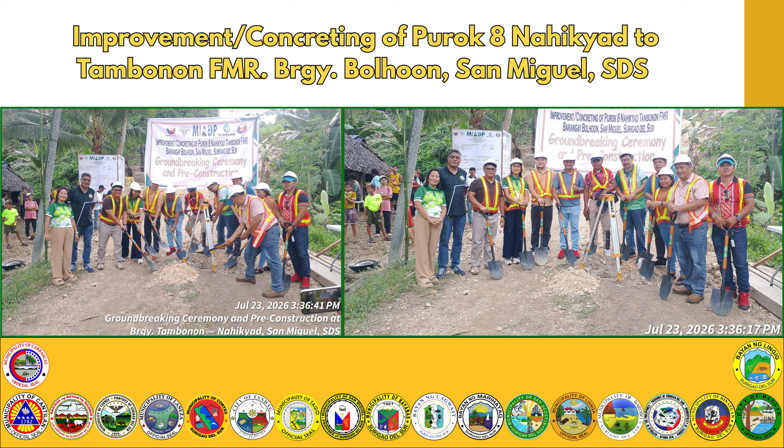Under the Mindanao Inclusive Agriculture Development Project, or MIADP, the Provincial Engineers Office is implementing projects amounting to 58.39 million pesos. To officially commence these projects, a groundbreaking ceremony and pre-construction conference were conducted in coordination with our stakeholders, ensuring that implementation would proceed smoothly and in accordance with project standards.

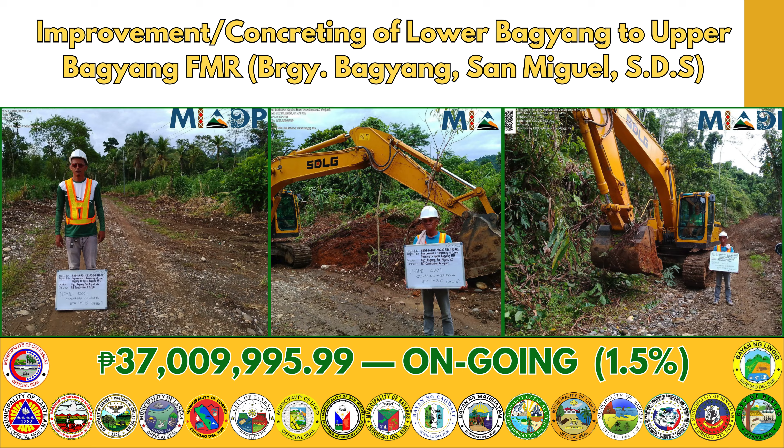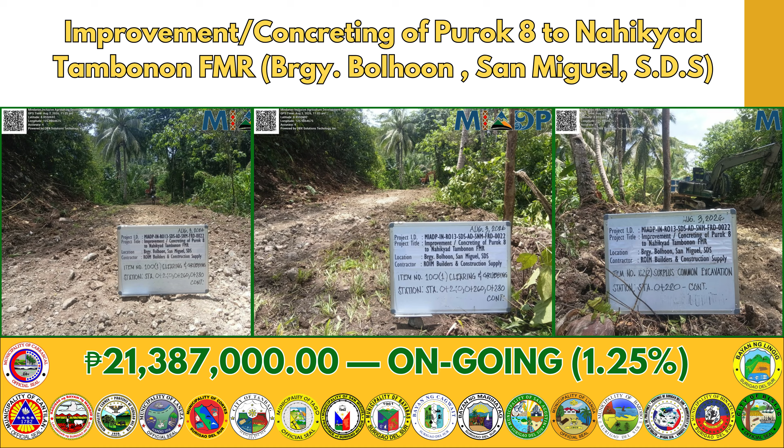Construction is now underway for the Lower Bagyang to Upper Bagyang Farm-to-Market Road and the Purok 8 Nahikyad Tambonon Farm-to-Market Road, both in San Miguel. These projects are steadily progressing and are expected to improve connectivity, support agricultural productivity, and create better opportunities for the communities they serve.

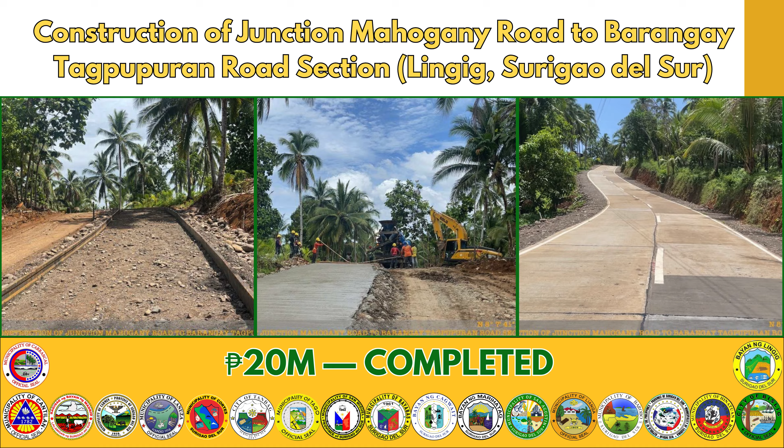Under the LGSF-FALGU program, with a total allocation of 45 million pesos, the Provincial Engineers Office successfully completed both Phase 1 and Phase 2 of the Junction Mahogany Road to Barangay Tagpupuran Road in the municipality of Lingig. These completed projects have significantly improved road connectivity and accessibility for the local community.

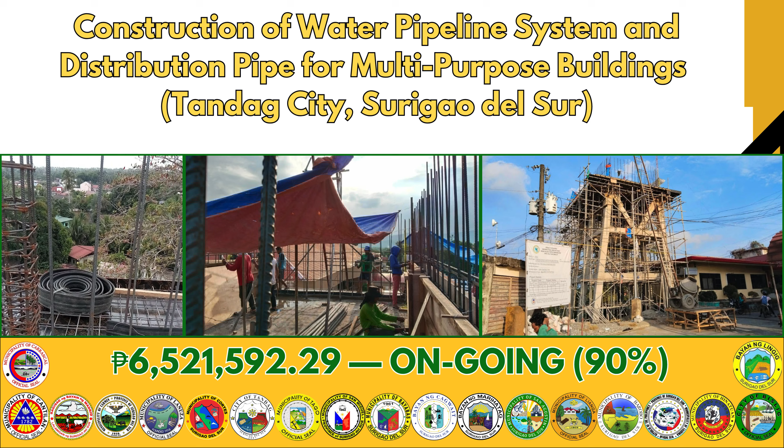Under the National Wealth Fund, projects amounting to 37.45 million pesos continue to make steady progress. These include the construction of the water pipeline system in Tandag City and the completion of the Madrid District Hospital multipurpose building, both of which are nearing completion and will strengthen public services within the province.

Through the PAMANA program, infrastructure projects continue to improve connectivity in geographically isolated communities. PAMANA Office of the Presidential Advisor on the Peace Process, OPAPP, funded 50 million for road construction in San Miguel, and PAMANA Department of Agriculture funded 66.65 million for road opening and concreting at San Agustin. This is expected to provide safer travel, improve access to government services, and support local economic development.

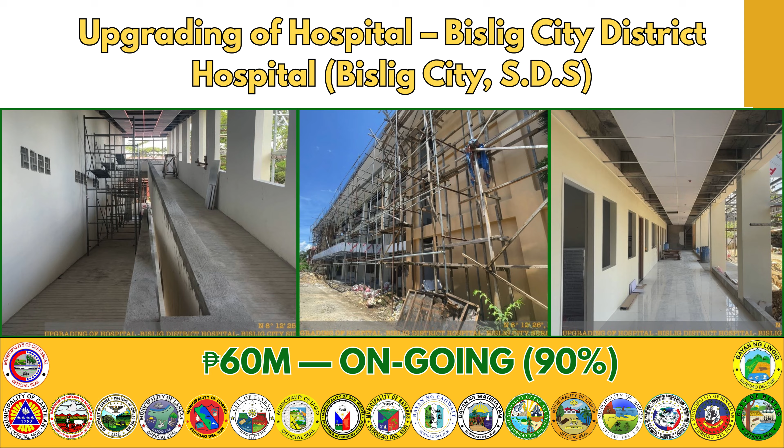Under the Health Facilities Enhancement Program, the upgrading of Bislig District Hospital and Lingig Community Hospital continues to progress. This project demonstrates our commitment to improving healthcare infrastructure and ensuring better medical services to our constituents.

Moving to our locally funded projects, the 20% Economic Development Fund, amounting to over 156 million pesos, continues to finance priority infrastructure across the province. Several projects have already been completed, while others are progressing well, contributing to improved transportation and public facilities in our municipalities.

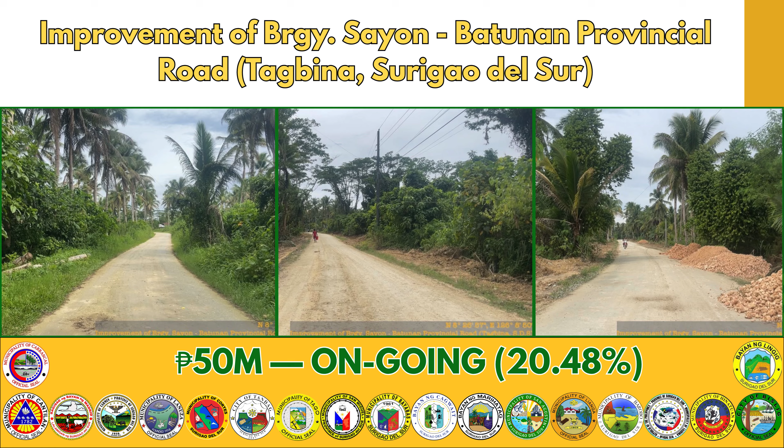Under the General Fund, the Provincial Engineers Office continues the implementation of road improvement and public infrastructure projects in Tandag City, Bayabas, Bislig City, and Lingig. These projects are steadily progressing and will further enhance accessibility and public service delivery.

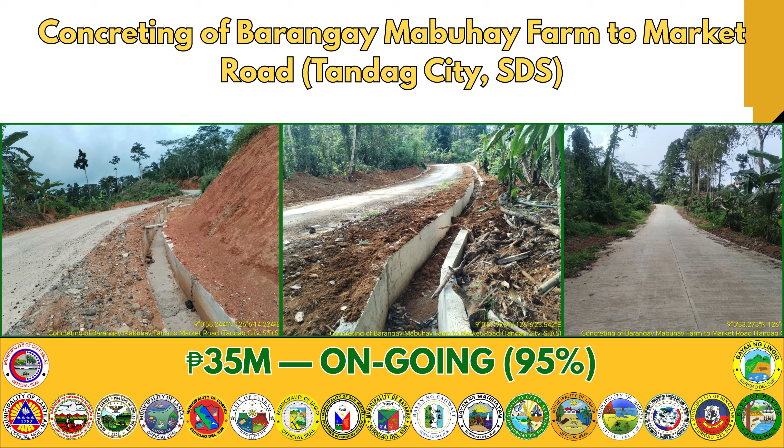Projects funded under the Peace and Order Program, with a total allocation exceeding 208 million pesos, focus on improving farm-to-market roads and provincial road networks. These initiatives help strengthen mobility, promote peace and development, and improve access to remote communities.

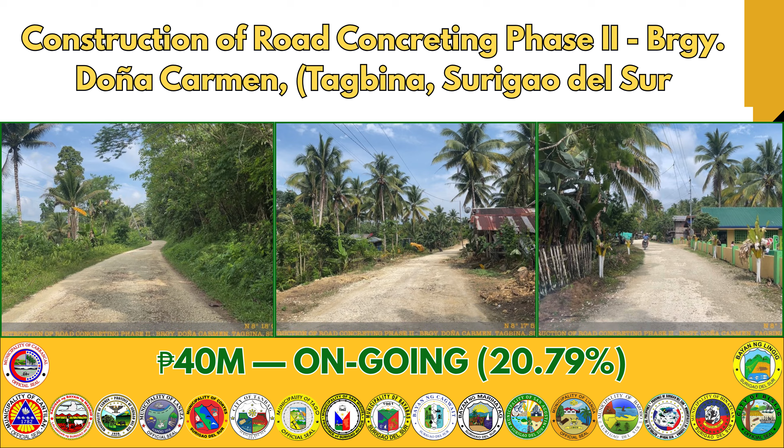Under the PDRRMO continuing appropriation with an allocation of 30 million pesos, the construction of the PDRRMO Building Phase 1 is also progressing steadily. Once completed, this facility will further strengthen the province's disaster preparedness and emergency response capabilities.

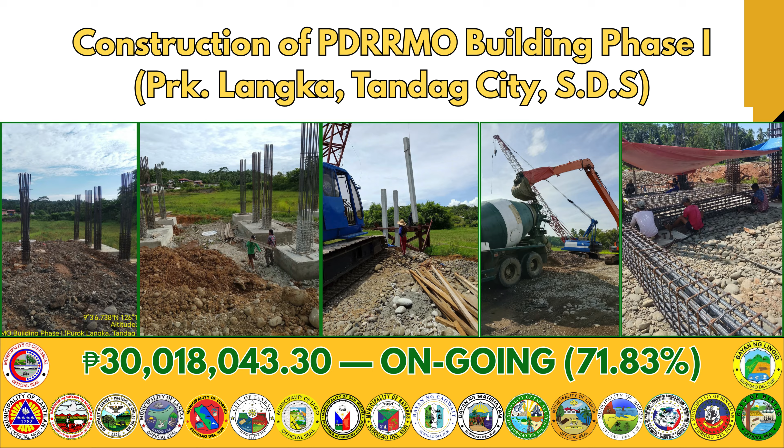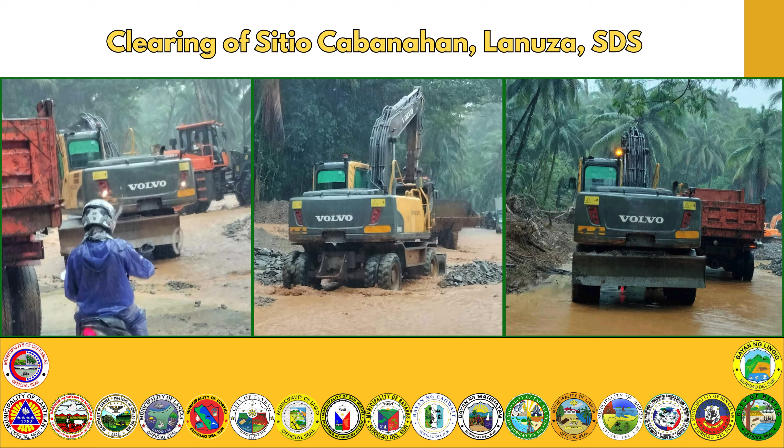In response to the devastation caused by Typhoon Bashang, the Provincial Engineers Office immediately deployed personnel and heavy equipment to conduct clearing operations across Surigao del Sur. Our priority was to restore road accessibility, ensure public safety, and support affected communities.

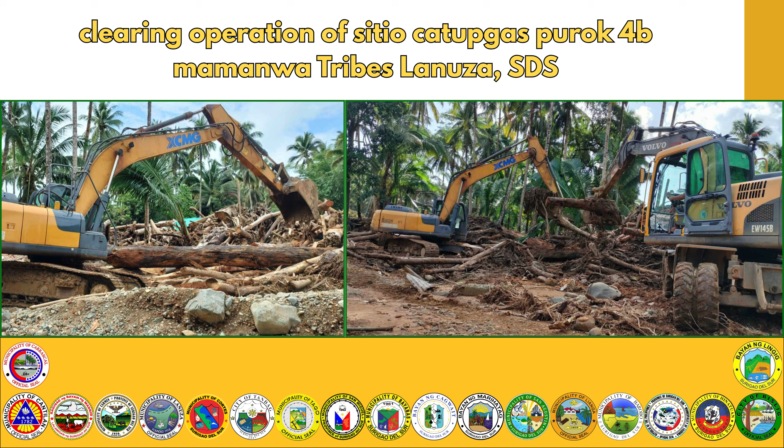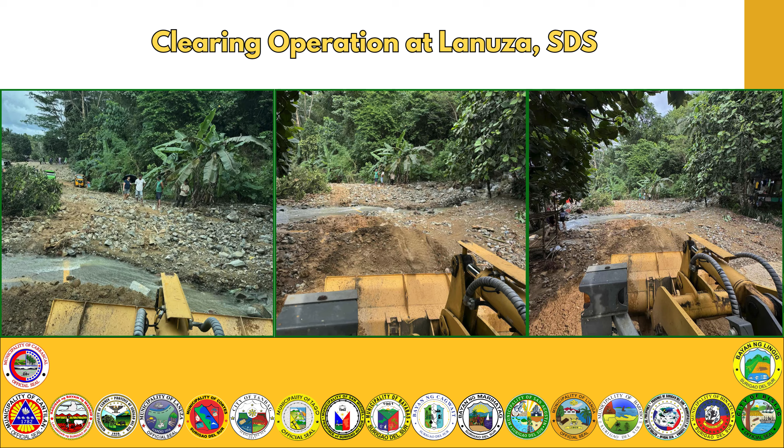Emergency clearing activities were carried out in the municipalities of Carmen, Lanuza, Cortes, Tandag City, Bayabas, Cagwait, Bislig City, and Lingig. These operations involved the removal of landslides, fallen trees, debris, and other road obstructions, allowing the safe passage of motorists, emergency responders, and relief operations.

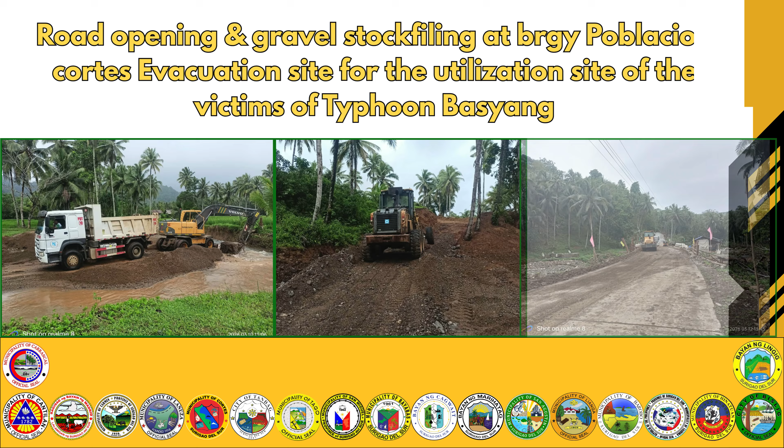These accomplishments reflect the dedication and teamwork of the Provincial Engineers Office, in close coordination with the provincial government and partner agencies, in ensuring the safety and resilience of the people of Surigao del Sur.

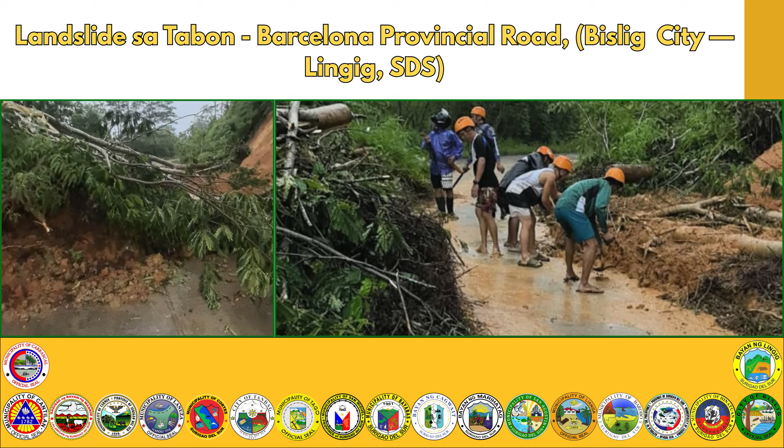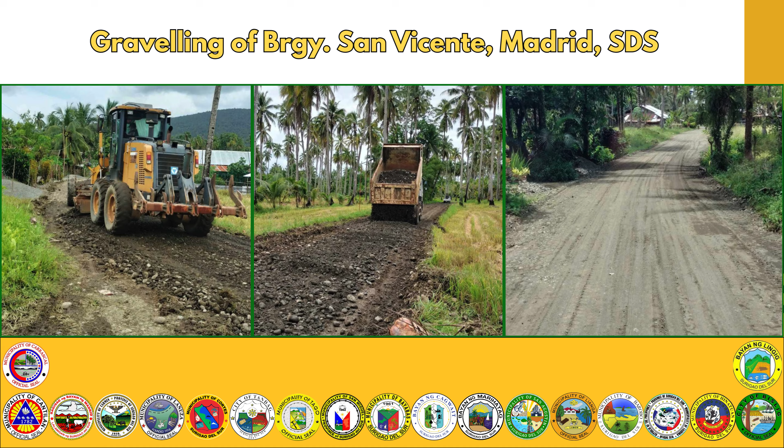Road maintenance is one of the office's core responsibilities. During the reporting period, the Provincial Engineers Office successfully repaired and maintained 268.98 kilometers of roads, hauled over 208,000 cubic meters of embankment materials, and provided engineering services to 65 barangays throughout the province. Projects covered a wide range of infrastructure activities, including graveling, road opening, clearing and grubbing, reshaping and compaction, bridge approach filling, backfilling, road widening, excavation, and ground improvement.

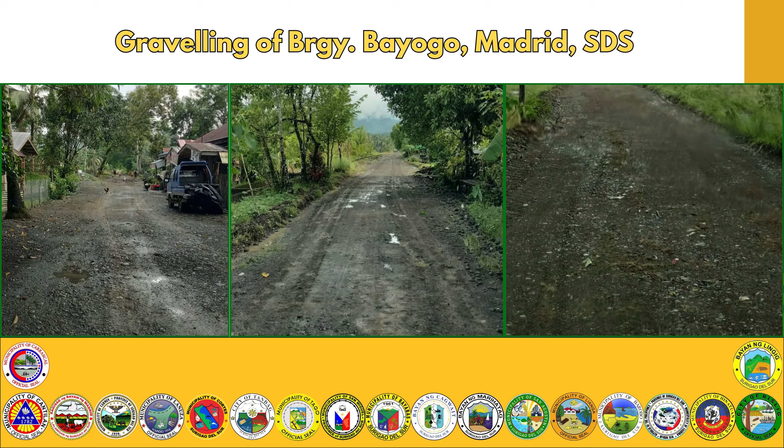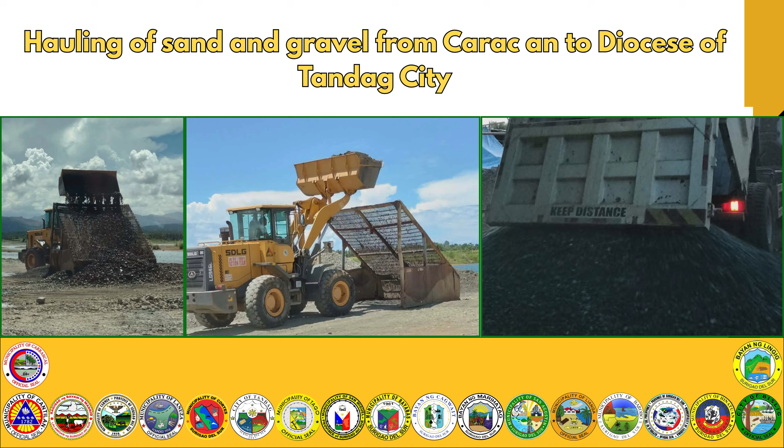These interventions were carried out in numerous municipalities to address road conditions, improve connectivity, and support the mobility needs of local residents. Beyond improving road conditions, these accomplishments have contributed to easier access to schools, health facilities, evacuation centers, agricultural areas, and other essential public services. They also support economic growth by facilitating the movement of people, goods, and services, particularly in remote and underserved communities.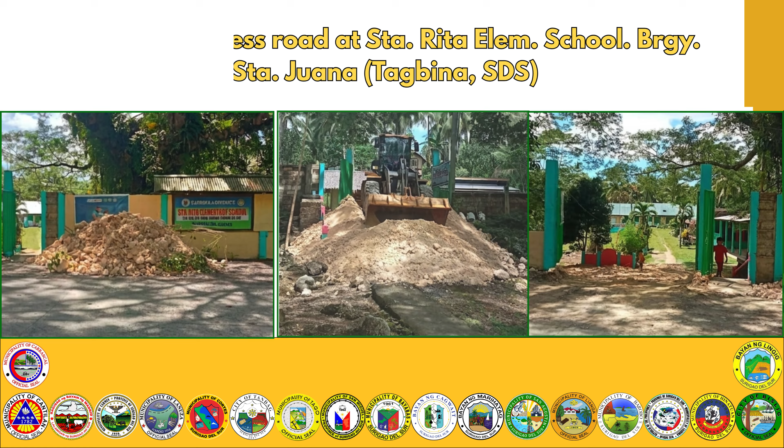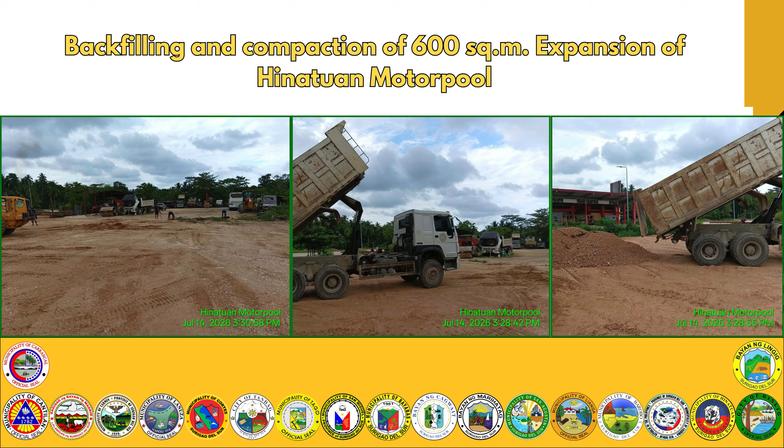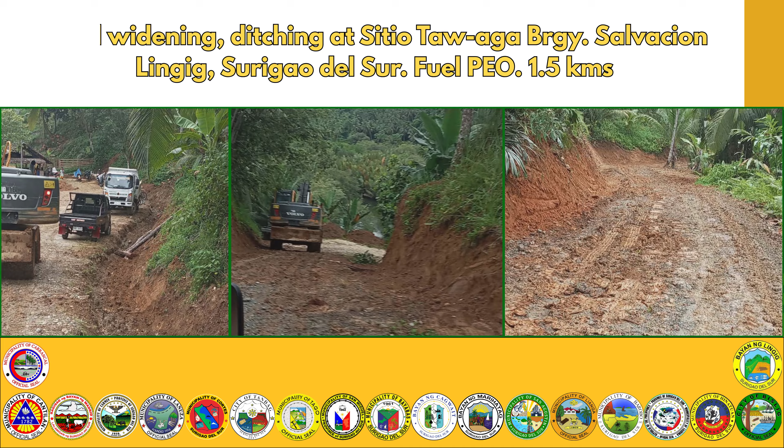Overall, these achievements reflect the provincial government's unwavering commitment to providing quality infrastructure and delivering responsive public service. Through continuous maintenance and improvement of the province's road network, the Provincial Engineers Office remains dedicated to promoting safer roads, stronger communities, and sustainable development for the people of Surigao del Sur.

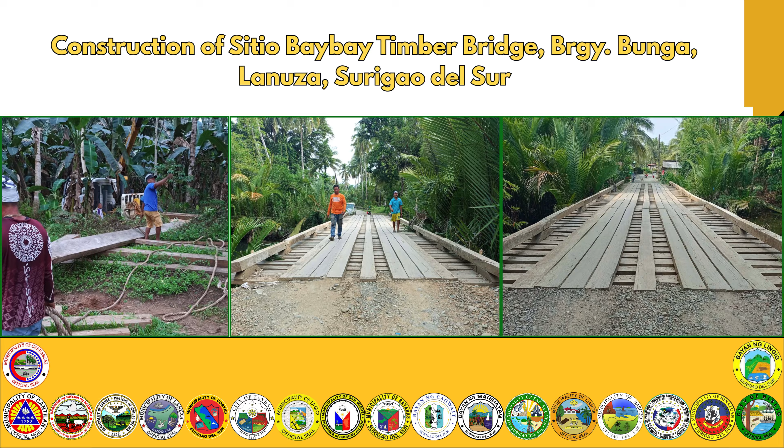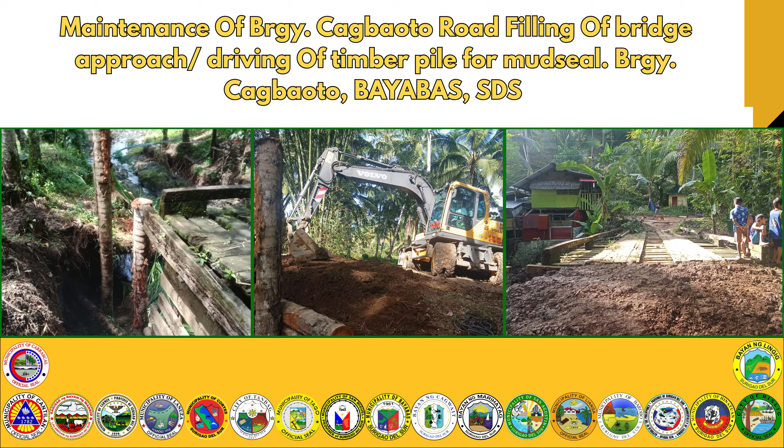Timber bridge projects remain an essential component of the Provincial Engineers Office. During the reporting period, construction, rehabilitation, and maintenance works were successfully completed in Lanuza, Cortes, Tago, Bayabas, San Miguel, and San Agustin, providing safer and more dependable access for residents. These completed bridges have strengthened transportation links between barangays, supported the movement of people, goods, and services, and contributed to the social and economic development of the communities they serve.

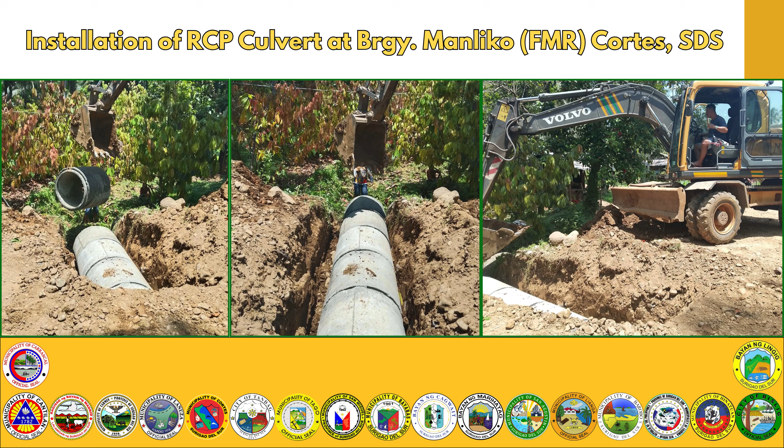Complementing the bridge projects, culverts were installed in Cortes and San Agustin to improve drainage and safeguard road infrastructure. These structures help prevent flooding, minimize road deterioration, and ensure safer and more reliable travel, particularly during periods of heavy rainfall.

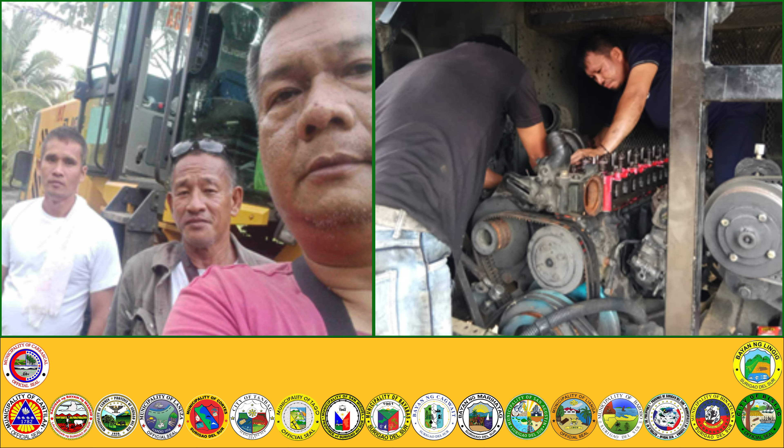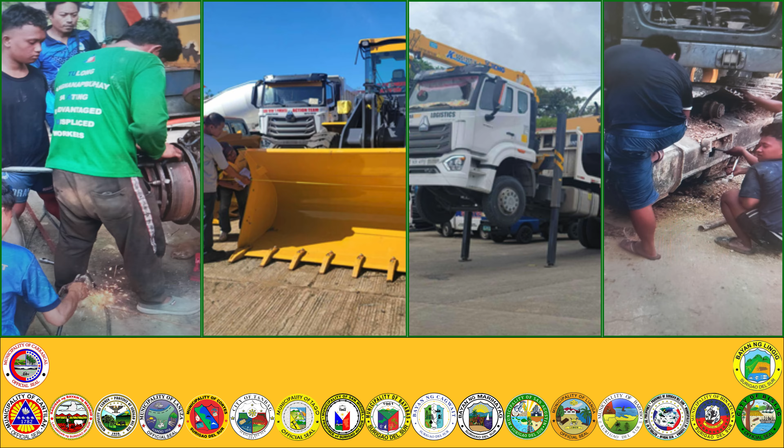Repair and maintenance of provincial heavy equipment. Efficient project implementation depends on reliable equipment. Throughout the reporting period, the Provincial Engineers Office continued the repair and preventive maintenance of its heavy equipment fleet to ensure uninterrupted support for construction, maintenance, and disaster response operations.

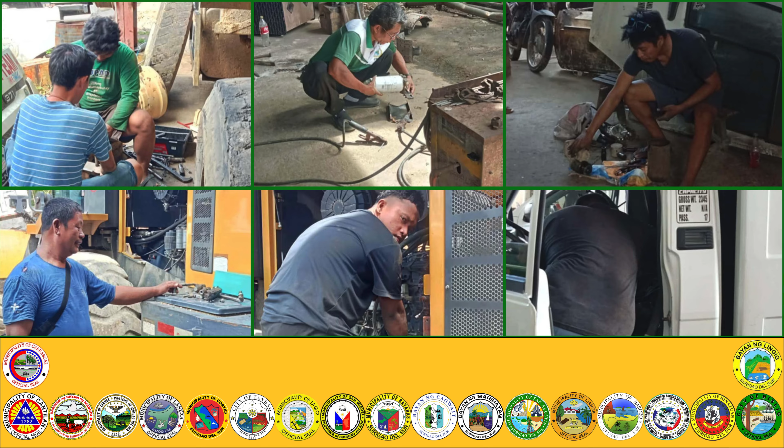Beyond infrastructure development, the Provincial Engineers Office also remains committed to empowering our constituents through the Jobs Through TechVoc program of the Provincial Skills Training Center. During the reporting period, the office conducted skills training on driving NC2, equipping participants with the technical knowledge, practical driving skills, and competencies needed to meet national certification standards.

Capacity development trainings, seminars, and awards. Our personnel also participated in various technical trainings, coordination meetings, and professional development activities to strengthen engineering competencies, improve project management, and ensure that our services remain responsive to the evolving needs of the province.

Validation for SubayBAYAN Awards. The Provincial Local Government Unit of Surigao del Sur has officially advanced to the second round of validation for potential endorsement to the Department of the Interior and Local Government, DILG Central Office, for the prestigious fiscal year 2026 SubayBAYAN Awards.

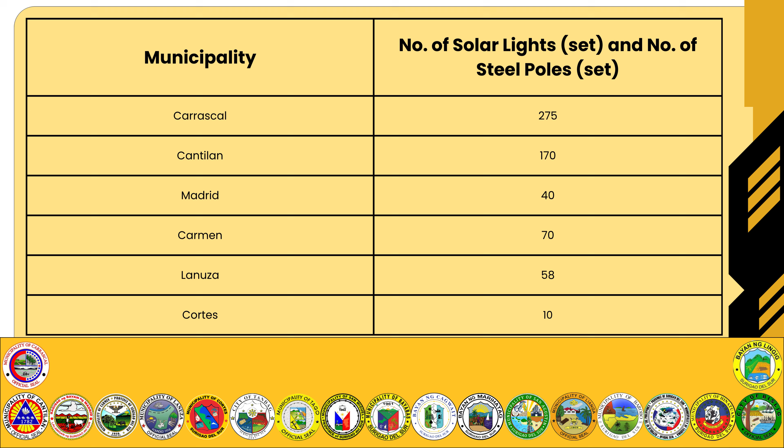To promote safer and more sustainable communities, the provincial government purchased 2,000 sets of solar street lights valued at 44 million pesos, where over 1,500 solar street lights were released to municipalities province-wide. This initiative enhances road safety, strengthens public security, and supports the province's commitment to renewable energy solutions.

The men and women of the Provincial Engineers Office, headed by our Provincial Engineer, Engineer Eleuterio Escobedo Jr., assisted by Engineer Henrito A. Simplicio for Administration and Engineer Estercasio Z. Fuego Jr. for Operation.

The Administrative Division, headed by our Supervising Administrative Officer, Mr. Avelino C. Balatero. Design and Programming Division, headed by Engineer 4 Maria Lady Luz Sabanal Cabrera, Division Chief. The Construction and Maintenance Division, headed by Engineer 4 Ronnie G. Calamba. The Equipment Pool Division, headed by Engineer 4 Carl T. Paradero. The Manpower and Extension of the Engineering Office in the 2nd District of our province, headed by Assistant Provincial Engineer Estercasio Z. Fuego and the Team Leader Alfonseto C. Boitio.